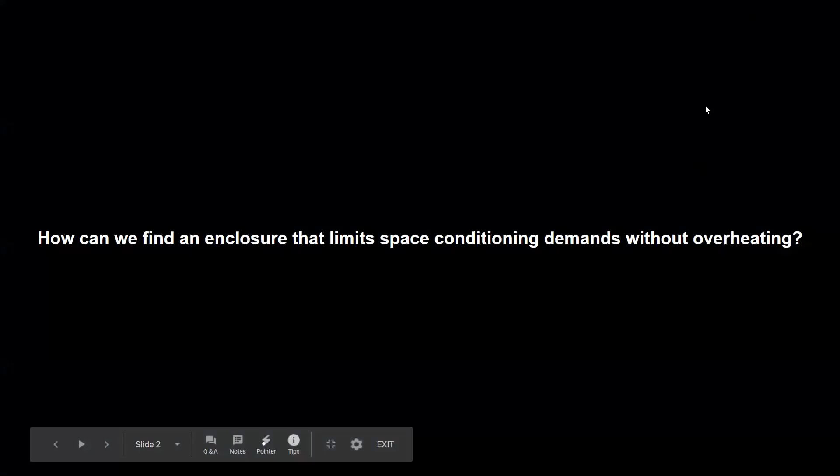So the question we're going to ask here today is, how can we find an enclosure that limits space conditioning demands and we're not going to cause overheating, which can be a bit of a passive house issue. And please interrupt with any questions as you have them.

So we're going to look at a Philadelphia small multifamily building. I'm from Chicago, which I understand is a fairly similar climate to Philadelphia. So we've got cold winters, we've got hot, humid summers. This is a baseline multifamily building, 32,000 square feet of insulated conditioned floor area. We're going to use the Philadelphia International Airport weather file. It's set in an urban context, and it's a 64-unit building for 96 design occupants.

And WUFI as a tool is a little different because the results it gives you in terms of heating demand, heating load, and cooling load are all passive demand. So it has no context to the mechanical equipment you've picked. And this is important because as architects, you have the biggest influence over the building enclosure, which has the biggest influence over the passive demands of the building, primarily space conditioning.

And while you put a little bit more money into an enclosure up front, you're going to be saving money on smaller equipment sizes and stuff like that. So I think that's why it's valuable to do a study like this. And then the source energy and the site energy are based on the equipment. So you can put in some default equipment to start as you're doing this study.

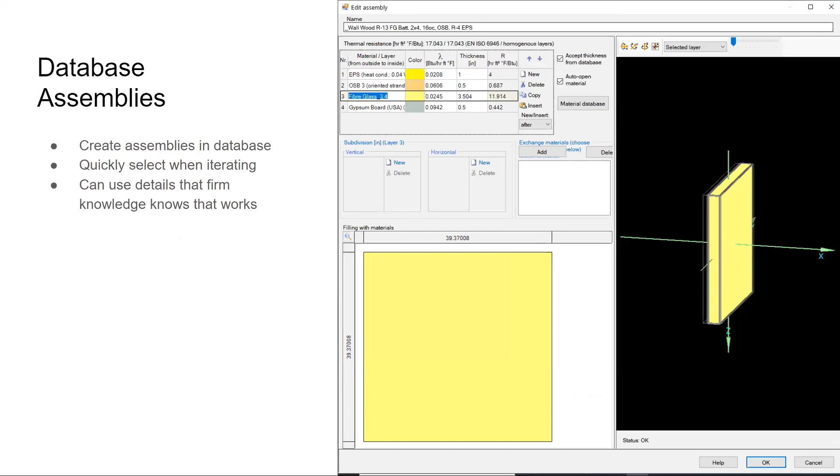So the first thing I'd recommend doing is figuring out what assemblies your firm has used in the past, or if you have a collection of assemblies you're interested in exploring, you can go ahead and just put those into a database. And then as you're working on your iterations manually, you can pull an assembly that you want to use from the database that you've built.

So for this example, I've decided to go ahead with a code baseline. I'm following the IECC 2018 requirements for Philadelphia. And after I've put together the baseline, the first thing I'm going to do is look at the reports. And the reports we have here in WUFI, let me get this to the bottom so I can see what I'm doing here, we've got annual heating demand, annual cooling demand, heating load and cooling load.

They're broken out into the demands on either side, and then each one is broken out as to where it's happening. So for example, in the winter energy balance, our heating and our internal gains are making up the loss. Our primary loss is windows, and then the second highest category is walls, and then ventilation. And we're going to keep track of our results as we work through these iterations.

So the first thing, windows being the biggest category that we have to deal with, we're going to go ahead and change out the windows. So from the code minimum U-0.38 windows, I'm going to try a U-0.27 window. And I got a significant reduction in the heating demand, a significant reduction in the heating load, but I am experiencing a slight increase in the cooling demand. We're keeping more of that heat inside the building.

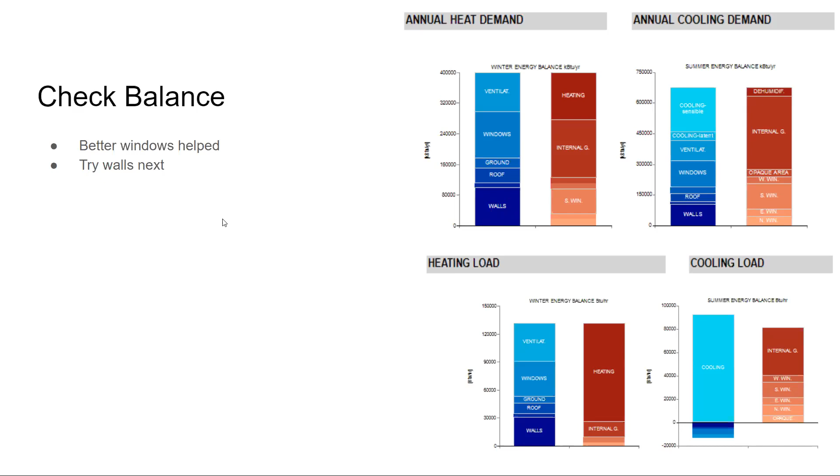So then look again at your feedback that you've got from your model. We squished the windows down a little bit in terms of the heating demand, and we squished them down a little bit in terms of the annual heating load. And now what we would probably want to attack next is the walls. So we're going to try to adjust the walls.

We're replacing the base case R13 with 4 inches of R4 EPS on the outside. We're going to just increase the EPS value on the walls. And again, we're seeing a similar sized 30% reduction in heating demand, which is your annual heating usage, and a 14% reduction in your peak heating load size. So again, we're saving money on any type of HVAC equipment we select later down the road.

And these bars at the bottom here are handy if you're working on a PHIUS certification, or if you have a target in mind. For example, you want to try and fit under a certain size equipment, you can go ahead and enter those manually, and you'll just get a check mark if you're hitting it. If not, it's handy to watch the bars as you're moving along.

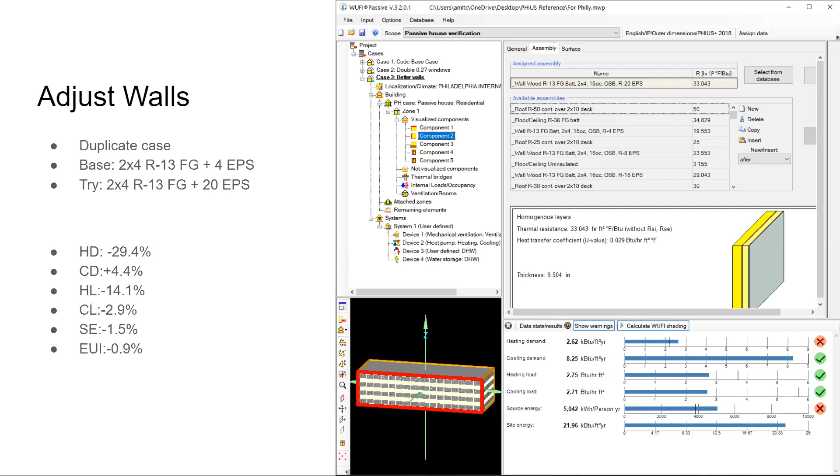And you'll notice too, as we've gone through these past 2 iterations, we're only seeing small changes in source energy per person and our EUI targets. Like I said, that's based on what the equipment efficiencies are. And ultimately the impact on that is primarily driven by your mechanical engineers.

So we're going to look at our balance again. We've squished the walls down significantly. This entire bar started around like 400,000 kBTUs per year, and we're down about 350,000 kBTUs per year in the annual heating demand. So the same thing down here, we've decreased the demand on the walls and the heating. And over here, we're not seeing too much. There's the cooling load here, but we're not seeing a ridiculous amount of cooling in the feedback. So we know we haven't pushed the energy balance too far towards cooling yet.

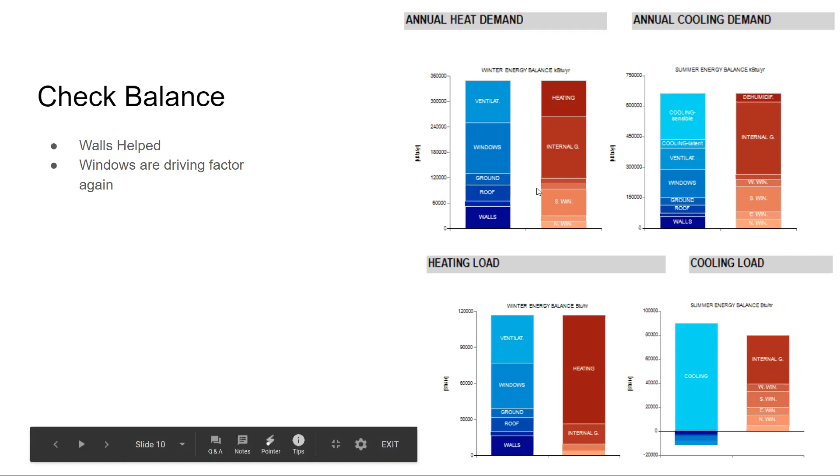So our windows are a driving factor again. And again, we've got this database that we put together of all of the assemblies that we know we can get, or that we know how to install, or based on our detail library the firm has. And we're going to go ahead and adjust those windows one more time, because we were experiencing an increase in cooling demand as we continue to tighten the enclosure of the building.

I went ahead and selected windows that have a solar heat gain coefficient of about 0.27 instead of the 0.46. That could be another big driver in the overheating here. And we actually saw a decrease in the cooling demand and the cooling load as well. That was fairly significant, about 17% for each here. And then we've had another reduction in the site, the source energy per person, and the EUI.

Hey, Al. Yeah. Clarification question for myself and the audience: when you use the term demand versus load? Yes. Understanding our terminologies. So I know it's a little confusing, and it confused me at first. In this case, demand is your annual ideal air load, no mechanical equipment applied, energy consumption for heating and cooling. And then the load is your peak. That's what you're going to end up sizing your mechanical equipment on. So both of those are equipment agnostic. One of them is annual. One of them is the worst case scenario. Is that clear?

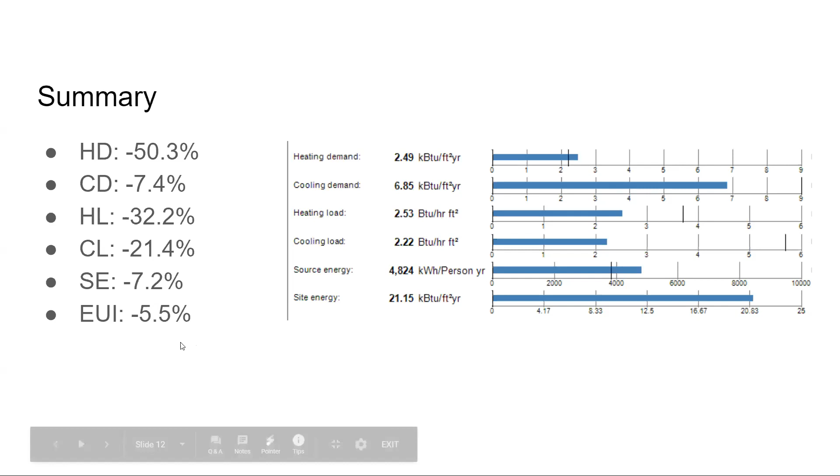And then because we didn't adjust any of the efficiencies or the equipment that people are using, we're not seeing a significant reduction in the source energy or the EUI, but we are seeing a slight savings in that. And then just a couple pointers, my key takeaways here: when you're using the energy modeling tool for one of these studies, you can do a single task study, right?

We're only looking at elements in the enclosure, but it's important to keep your eyes on multiple objectives. So in this case, we're able to keep our eyes on our heating demand and our heating annual demand, as well as our peak equipment loads, as well as our total EUI. And if you're looking at just EUI, I don't think you're really getting the whole picture as to what the changes you're doing are affecting.

Again, as architects, we have the biggest impact through the building enclosure. And that's when it comes to the detailing, the selection of the assemblies, the adjustment of window areas and window specifications. And then the reduction in the peak load sizing is going to come back as a savings on mechanical equipment.

And then the other thing I think that's important is as you're working through every step of an energy model, you always need to be asking yourself, does this seem reasonable? Because sometimes if you changed out the windows for a higher performance window and you see the windows end up taking a bigger area of the load balance, or you see a change that doesn't make sense to you, that's a good indicator that something's wrong and it's time to check it.

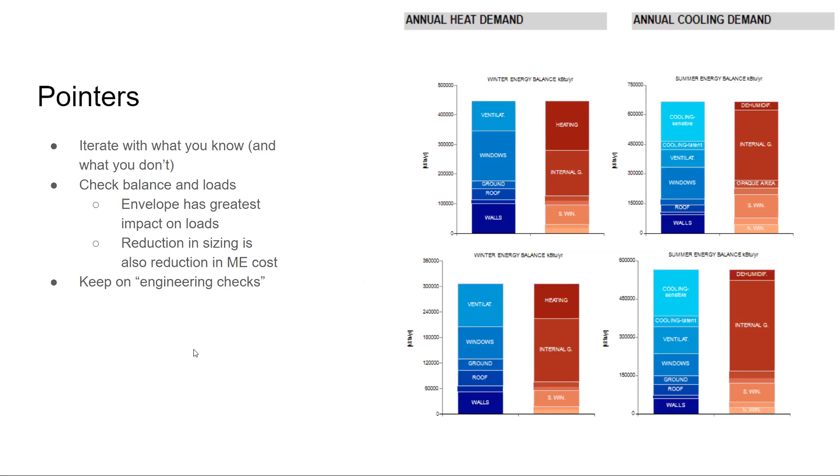I'll throw one out. So you indicated at the very beginning that in looking at this specific building type, you have three major areas in which we're seeing the greatest losses or energy impact: windows, walls, and ventilation. Given that WUFI or passive house requires a lot of air tightness, was that a scenario that you looked at, or what did you have as your base assumption for air tightness and air exchanges?

Sure. And I believe in these diagrams, the effect of the air tightness comes through the assemblies. And the base case I used for this is I kept to the 0.06 CFM at 50 pascals per square foot for the enclosure as the PHIUS default. And a big reason why the air tightness is a set prescriptive requirement is just for the durability of the enclosure.

I did not adjust it in between any of these cases, but I'm sure we could go back and back that out if we needed to, and it would change the balance significantly. But looking at this load balance as well, the ventilation, the only tool we have to attack that would be to adjust the efficiency of whatever ventilation unit you're using. So if you're not using an energy recovery device, I think we'd have a significantly larger ventilation demand. But here, using an ERV, we're keeping that stable for now.

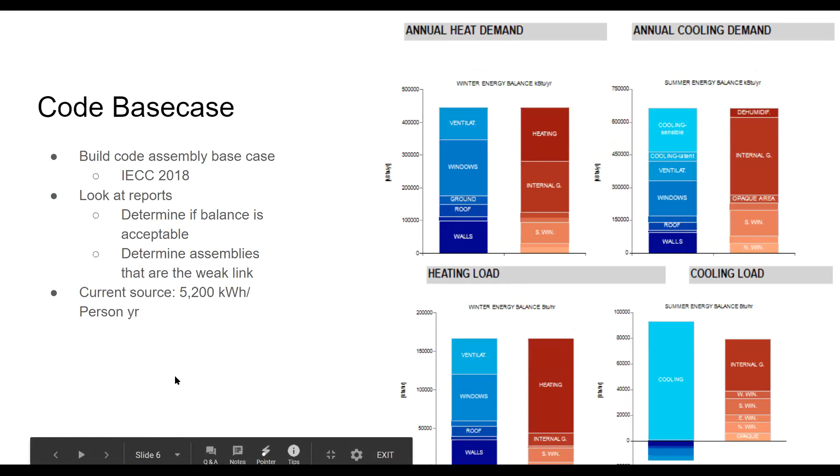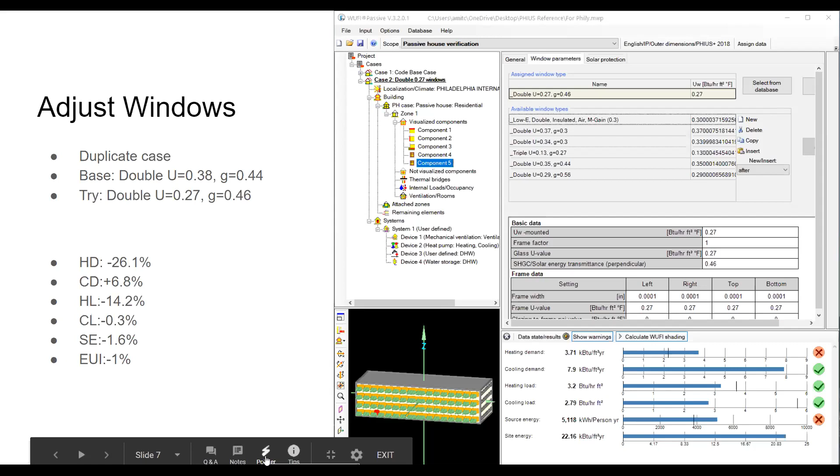So all of these analyses are mechanical systems agnostic. Is that correct? Sure, yeah. And I think that's an important thing to consider, especially in the early design phases, is if you can keep anything mechanical equipment agnostic, it's to your advantage because you don't have to worry about any of the systems efficiencies.

If you have a set system, then you're also not dealing with anything that's applied later by the mechanical engineer if they're going to end up changing something in the design. Like I mentioned, though, the one thing that is not system agnostic in what I'm looking at here is the ventilation equipment efficiency in terms of recovery efficiency.

So the WUFI Passive tool, does it have the ability to change occupancy type? Or is it all operating within sort of the housing typology?

Sure. And it is kind of a misnomer of the general branding of something being called passive house. The guidelines and using WUFI Passive work well on other building types, especially for commercial and anything right now that has a consistent use throughout the year. So it's an office or it's a lab or it's a hospital, and you pretty much have the same day-to-day functions and occupancy. You can model in WUFI Passive.

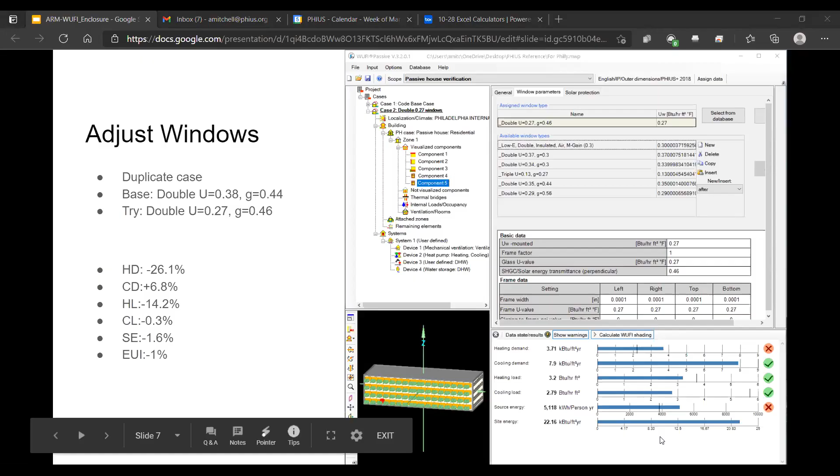Yeah, the name is a bit of a misnomer, and most people see passive house in the press as single family housing, multifamily housing. Yeah. And multifamily residential is probably the largest sector of projects we see certified.

But in here, you have the ability to select between residential and non-residential, and there's a couple options in the residential. But when you're setting up your internal loads and occupancy, you can adjust the occupant quantity based on the density of the building typology, whether it is residential or a commercial space, an office space, a store.

And then in the residential setup, you have the ability to go ahead and select all of the internal load elements. So in this case, we have a dishwasher per unit, a laundry washer and dryer, a fridge freezer combo, cooking, and then lighting, MELs, all of that's on top of the occupant heat gains.

And then if you're using a commercial setup, it'll ask you to go ahead and detail out any type of equipment in the space, be it computers, printers, computer monitors, if you're working in like an office space, or if you're working on a restaurant and you've got a kitchen, you can go ahead and put in the kitchen loads for there. But again, I think you'd have to have a library of defaults built up if you wanted to be able to model those quickly.